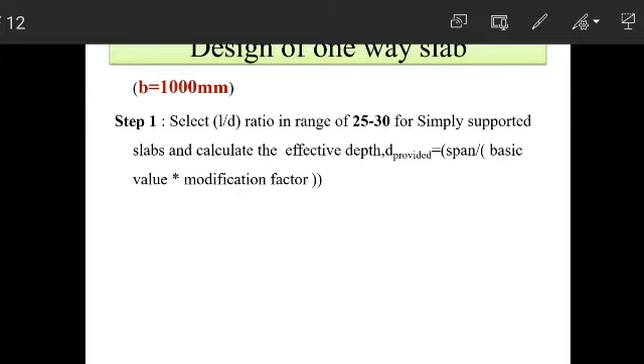First of all, in designing of slab, we will consider a 1 meter strip, because while designing a beam, the width is defined, and the cross-sectional dimensions of the beam are very less or negligible as compared to its length. In a beam, initially the width and depth are defined for us. But for designing a slab we have to design throughout the span, for the whole panel, for the whole room and for the whole floor. So instead of designing that large area, we will assume a 1 meter strip as the width, and apply that design to the entire slab.

So first step in designing of one-way slab is we will select the preliminary depth, that is initial depth, by using the span to depth ratio, and this span to depth ratio ranges between 25 to 30 for simply supported slabs.

As you know, the span to depth ratio is given in IS 456. The basic values are given for beams, that is for simply supported beam, for continuous beam, and for cantilever beam, if such beams have spans not exceeding 10 meters. If the span is not exceeding 10 meters, the basic value given is: simply supported 20, continuous 26, and cantilever 7.

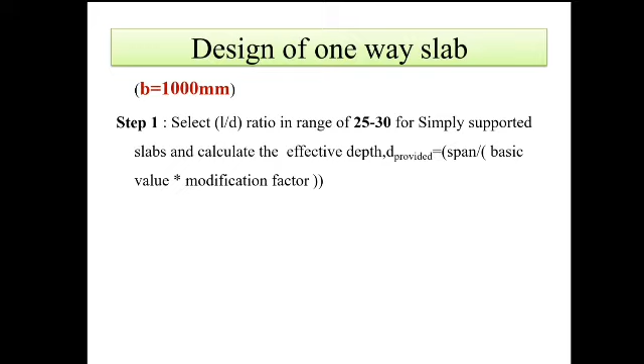These values are given in figure number 4 of IS 456, which is on page number 38, for tensile reinforcement. In that, two values we have to remember. That graph is given for different FS values, different stresses. That FS depends on the yield stress of reinforcement and the area of reinforcement we are going to provide.

You can see it on your slide. So this graph we will use for selecting the initial depth by assuming some percentage of steel.

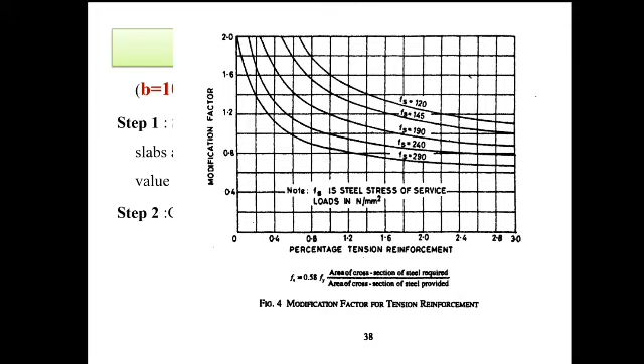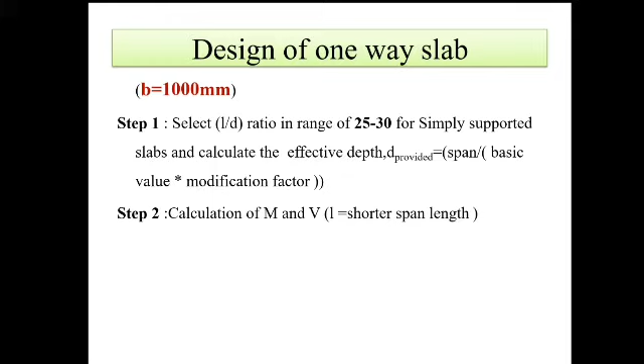Now the second step is calculation of bending moment and shear force, that is maximum bending moment and maximum shear force that the slab is going to take, or that much amount of moment and shear force that will be induced on that slab portion by the external loading. For calculating such moment and shear force, we will use the shorter span. Generally, in case of one-way slab, we will design for the shorter span. We will consider bending in the shorter direction, and we will provide main reinforcement in the shorter direction.

Now the third step is we will check our initial depth with respect to bending, that is we will check the minimum depth required for the bending criteria. For that purpose, we will equate the maximum bending moment obtained in the second step to the limiting bending moment, that is Mu limit, which we have already studied.

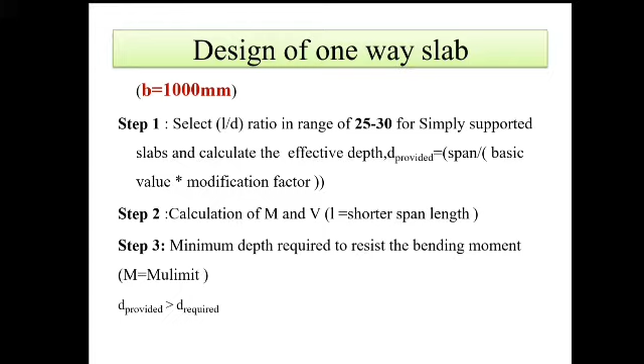Now the next step is calculation of reinforcement for the slab, per meter width of the slab.

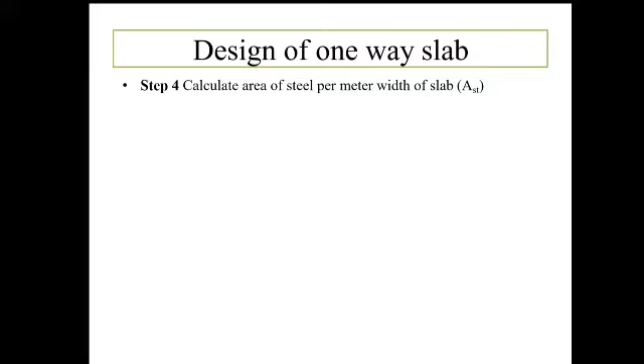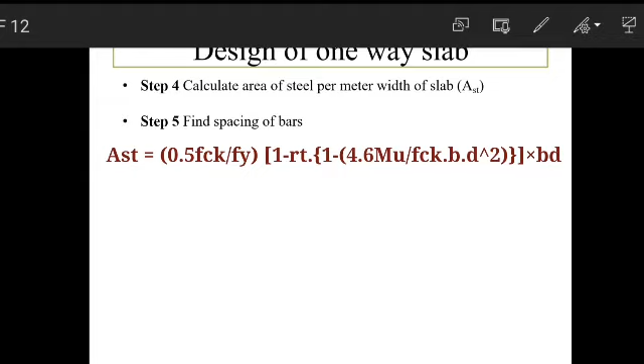For this purpose we will use the formula: AST equals to 0.5 FCK divided by fy, in bracket 1 minus under root of 1 minus 4.6 mu divided by FCK BD square, whole bracket into BD. This equation we will use for the calculation of main reinforcement.

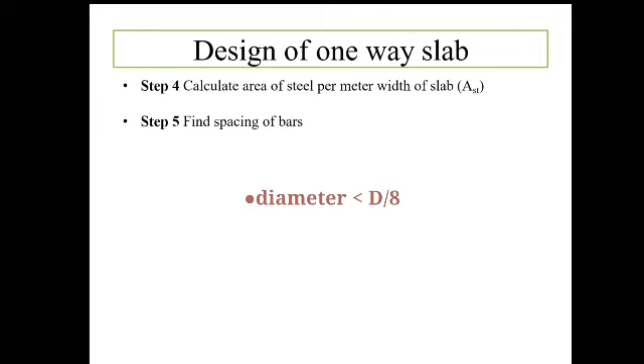Now next step is calculation of spacing required by assuming some diameter of the bar. This diameter of bar should not exceed 1/8 of the overall thickness. This criteria is given in IS 456.

Now next step is calculation of distribution reinforcement. Here we should remember the purpose of distribution reinforcement is to evenly transfer the load and stresses towards the main reinforcement.

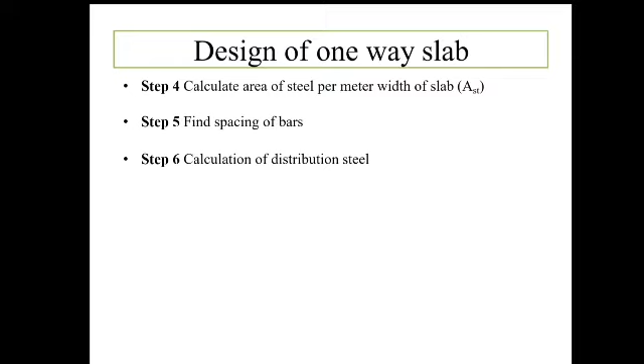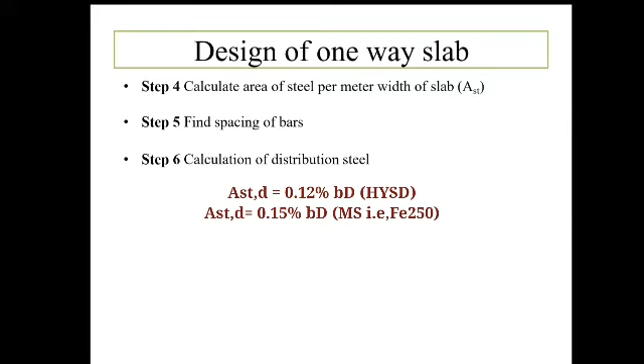Minimum reinforcement required for the slab is 0.12% and 0.15% of gross dimension of the selected portion of slab. 0.12% is for HYSD bars. If we are using HYSD bars or grades of steel as Fe 415 and higher grade, then we will take minimum reinforcement as 0.12% of gross cross-sectional area of the slab, that is 1 meter strip B multiplied by overall depth capital D, and 0.15% of gross cross-sectional area for mild steel.

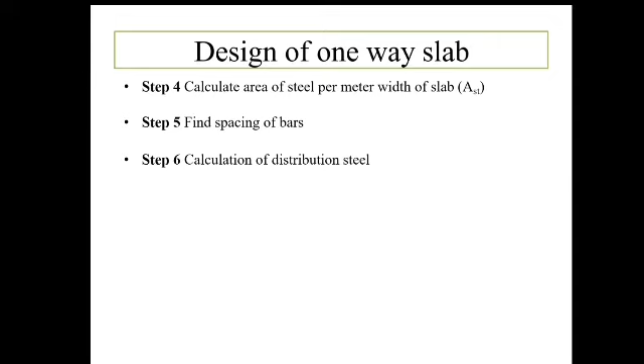After calculating ASTD, that is distribution reinforcement, we will find the spacing required. Then these both spacings will be checked as per the IS requirement. Now next step is we will check our design depth for the deflection purpose.

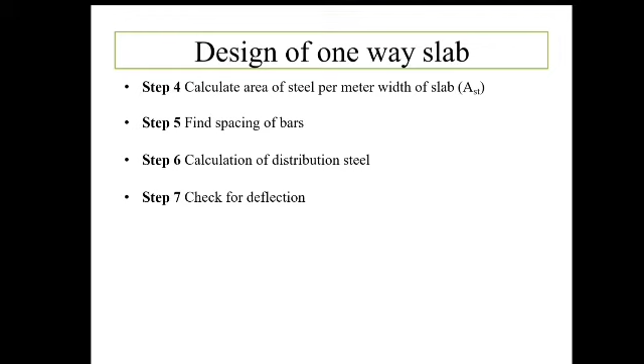Now after getting the AST and after providing some spacing we will get the AST provided, and for that AST provided we will find the percentage of steel we are providing. Based on that, our actual percentage of steel, we will again check the depth for deflection, same as we did in step number 1.

The next step we will check the depth for shear. Generally the slab will be safe in shear in all the cases.

Now for this purpose we will refer clause number 40.2.1.1 of IS 456. Now there is a slight change in the check of shear, in that we will not use the direct values obtained from the table for design shear stress.

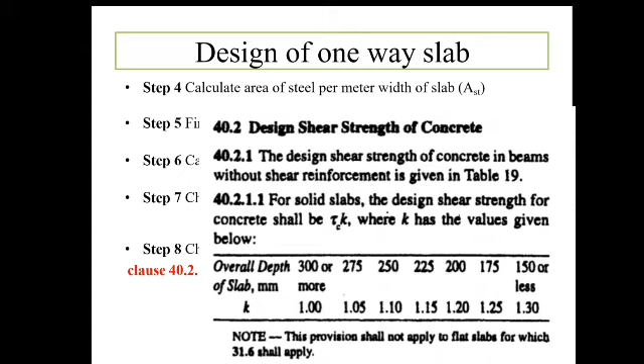Now this K depends on the overall thickness of the slab. So based on thickness we will find the value of K by using IS 456, and that value will be multiplied to the actual tau c, which we obtain from table number 19, page number 73 of IS 456, to get the tau c dash for our slab.

That tau c dash should be greater than tau v, that is nominal shear stress. But usually this tau c dash will always be greater than your tau v. Next step, in some cases we have to check the development length.

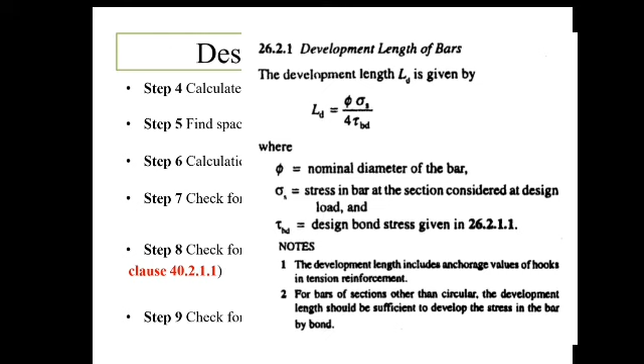That is, generally for continuous slabs we have to go for the check of development length, same as we did in the design of beam. That is, we will check the actual LD required. LD equals to 0.87 Fy into phi, that is diameter of reinforcement, divided by 4 times tau bd.

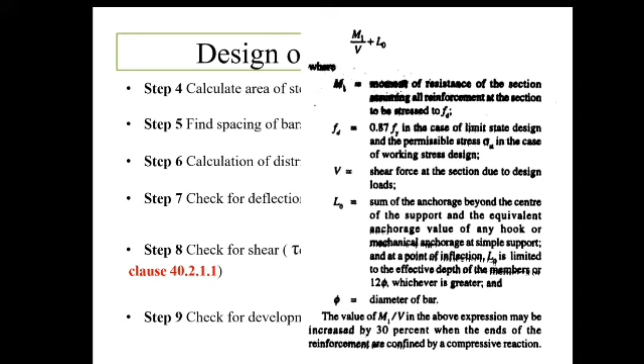That tau bd depends again on grades of concrete. That LD should be less than or equals to 1.3 times M1 divided by V, that is shear force at the support, plus L0. That L0 will be based on the diameter of reinforcement, 12 times phi, or effective depth.

Whichever is greater, we will take that as the value of L0. Now by using these steps we can easily design a one-way slab. Hope you have understood these steps very well.